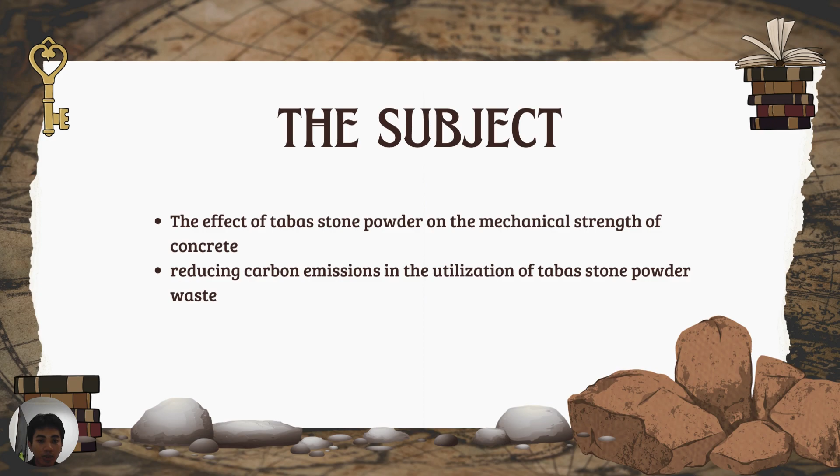Next is literature review. Number one, the influence of crushed stone powder on the mechanical strength of concrete. Some research that has been done shows that the use of stone powder can affect the mechanical strength of concrete. The research states that mixing concrete with stone powder can increase the compressive and tensile strength of concrete, which will affect the structural performance of the building.

Number two, the reduction of carbon emissions in the utilization of stone powder waste. Stone powder waste can potentially cause disturbance in the environment, especially if left alone. Previous research alluded to the potential of reducing carbon emissions in the utilization of stone powder. So this literature review provides a basis for further understanding of the use of tabas stone powder in sustainable construction concrete, and provides direction for further research in exploring its potential as an alternative sustainable construction material.

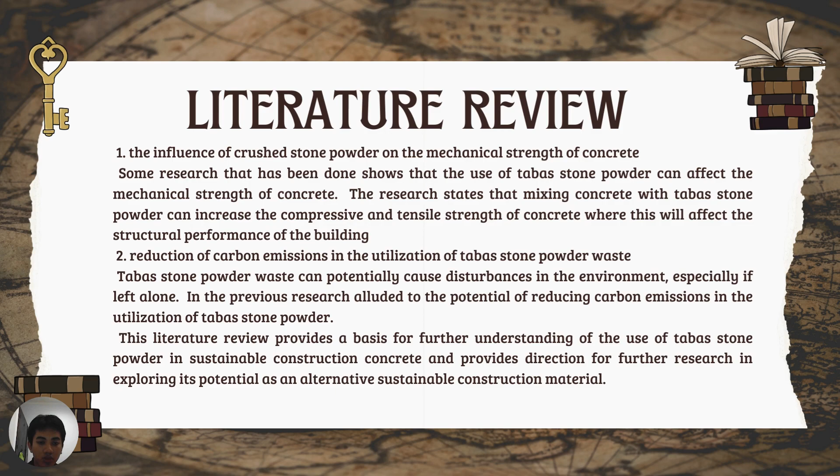Abstract. The construction industry, as one of the main sectors in the development of modern cities, has a major impact on the environment and natural resources.

One interesting potential to explore is the use of stone powder, waste from the stone cutting industry. The use of stone powder as a concrete mixture can be done because the powder has forming compounds that are similar to cementitious materials. Therefore, previous research has been carried out to test the strength of concrete

mixed with tabas stone powder. tabas stone is a stone that comes from frozen volcanic lava. This tabas stone is usually used to make traditional building ornaments by carving craftsmen. About 30% of the tabas stone processed by craftsmen will become waste, either in the form of gravel or grains of sand.

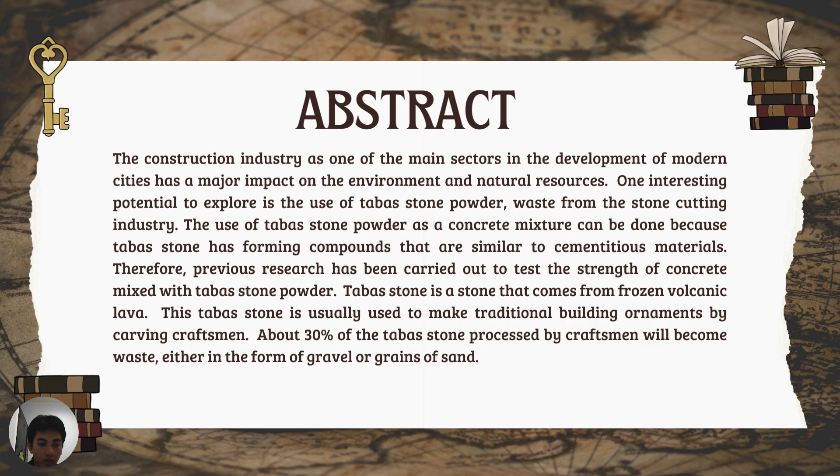Next is background. The construction industry, as one of the main sectors in the development of modern cities, has a great impact on the environment and natural resources. In an effort to create sustainable development, critical thinking continues to be directed at the development of environmentally friendly construction materials that can reduce the carbon footprint.

One of the interesting potentials to explore is the utilization of stone powder, waste from the stone cutting industry. This powder is often ignored and considered waste, but contains great potential as a substitute for part of the cement in the concrete mix. By looking for alternatives to reduce dependence on limited natural resources and reduce industrial waste, the use of tabas stone powder can be a progressive step towards more sustainable construction.

The background of this research reflects the urgent need to answer the challenges of sustainability in the construction industry. The development of construction methods that are not only technically effective but also environmentally friendly is essential. Therefore, this research will discuss the potential of tabas stone powder as one of the steps toward achieving sustainable development in the construction sector.

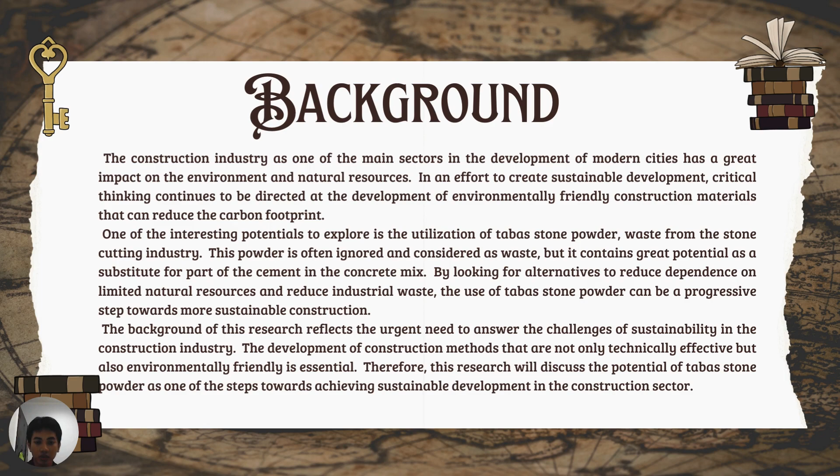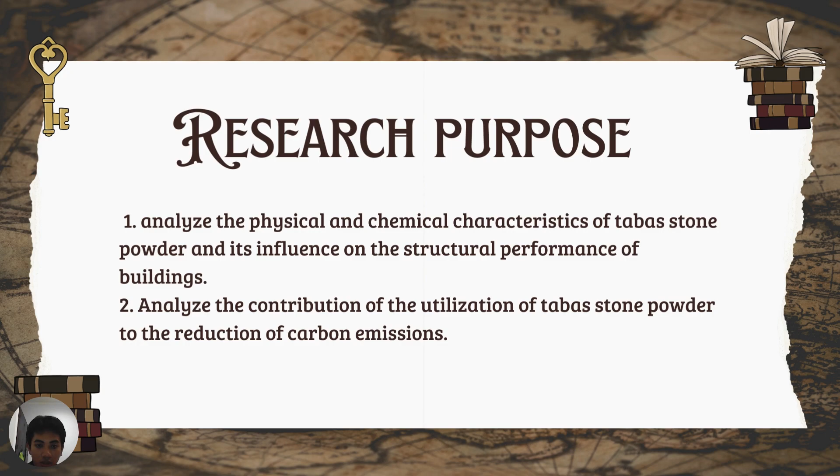Next is research purpose. Number one is to analyze the physical and chemical characteristics of tabas stone powder and its influence on the structural performance of buildings. Number two is to analyze the contribution of the utilization of tabas stone powder to the reduction of carbon emissions.

Discussion 1, the effect of tabas stone powder on the mechanical strength of concrete. The use of tabas stone powder as a concrete mixture can be done because tabas stone powder has forming compounds similar to cementitious materials. Therefore, previous research has been carried out to test the strength of concrete mixed with tabas stone powder, where the use of tabas stone powder can affect the strength of the concrete.

With a certain dose, the mechanical strength of concrete increases compared to using natural sand. When mixing tabas stone powder with natural sand, the compressive strength of the concrete is higher than natural sand without mixture. Likewise, with the tensile strength of concrete, a mixture of tabas stone powder with natural sand increases the tensile strength of concrete compared to using 100% natural sand.

Therefore, the use of tabas stone powder will affect the structural performance of the building. tabas stone powder can strengthen concrete. Strong concrete will produce a strong building structure. The stronger the building, the longer it will last.

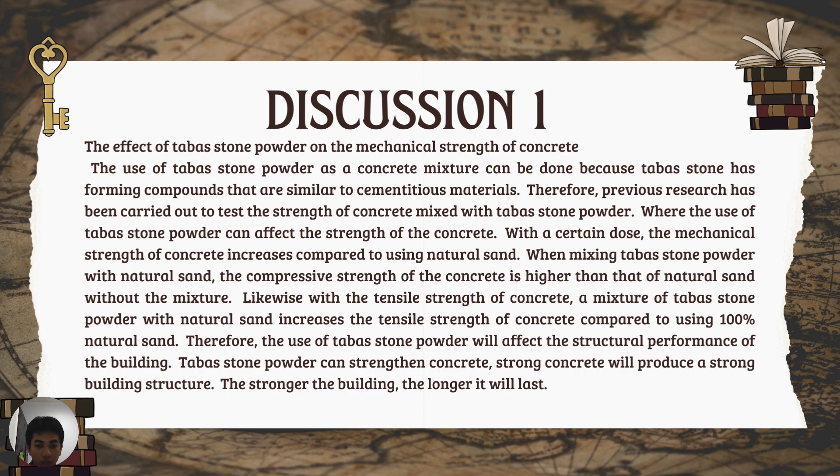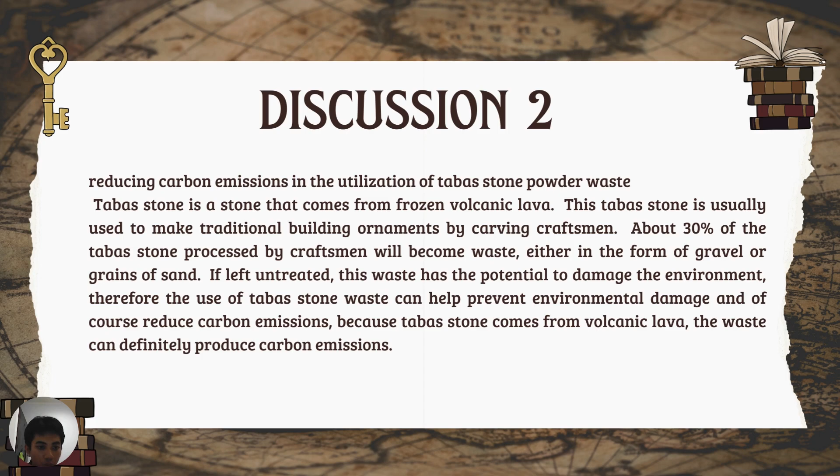Next, discussion 2, reducing carbon emissions in the utilization of tabas stone powder waste. tabas stone is a stone that comes from frozen volcanic lava. This tabas stone is usually used to make traditional building ornaments by carving craftsmen. About 30% of the tabas stone processed by craftsmen will become waste, either in the form of gravel or grains of sand. If left untreated, this waste has the potential to damage the environment. Therefore, the use of tabas stone powder can help prevent environmental damage and, of course, reduce carbon emissions. Because tabas stone comes from volcanic lava, the waste definitely produces carbon emissions.

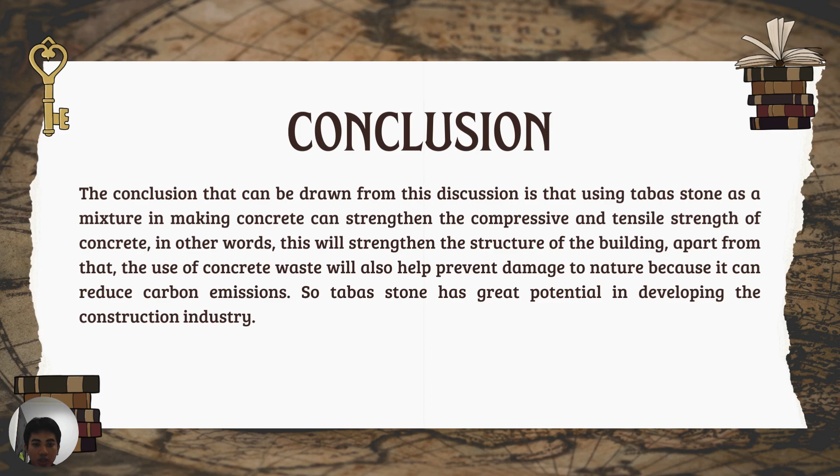And next is the conclusion. The conclusion that can be drawn from this discussion is that using tabas stone powder as a mixture can strengthen the compressive and tensile strength of concrete. In other words, this will strengthen the structure of the building. Apart from that, the use of concrete waste will also help prevent damage to nature because it can reduce carbon emissions. So, tabas stone has great potential in developing the construction industry.